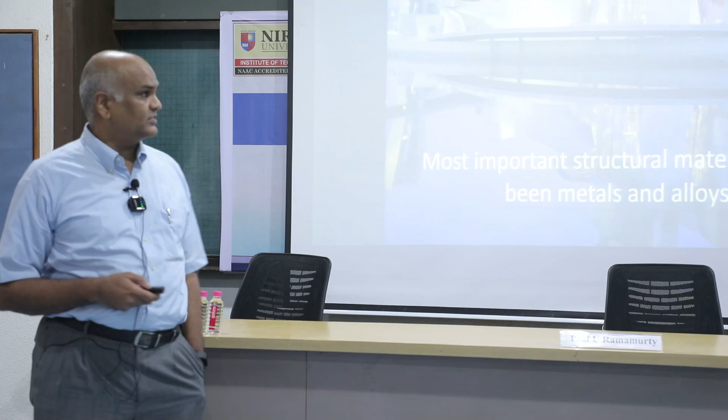Metals are arguably the most important materials in the human history. There is no doubt about it. Why is the case of metals so important? In fact, even our human civilizational development is divided into different ages on the basis of metals, Bronze Age, Iron Age, etc. Right? So, why are metals so important? Because metals are easy to work with. What I mean by work with means you can shape metals into different components, right? Very intricate shapes, like your jewelry that you're wearing, to very large components, for example, a wide-body aircraft, Dreamliner, etc.

And as Indians, those of you would be very proud that actually Indians are the ones who mastered metallurgy quite well in advance. So, ukku that used to be made in northern Hyderabad, those regions, is wootz steel. The steel that used to be exported, and Damascus steel, etc. That used to be very precious, for example. Okay. All right. So metals are very easy to work. You can make all kinds of shapes with them, and they are also tough. That is very important, right?

So let me ask you here, what is the difference between a civil engineer and a mechanical engineer? Both deal with stresses, right? Design of structures, so common things, everything. But civil engineers design structures that are static. Of course, when it comes to earthquake, they may be moving a little bit. But mechanical engineers devise structures that are mobile, cars, aeroplanes, etc.

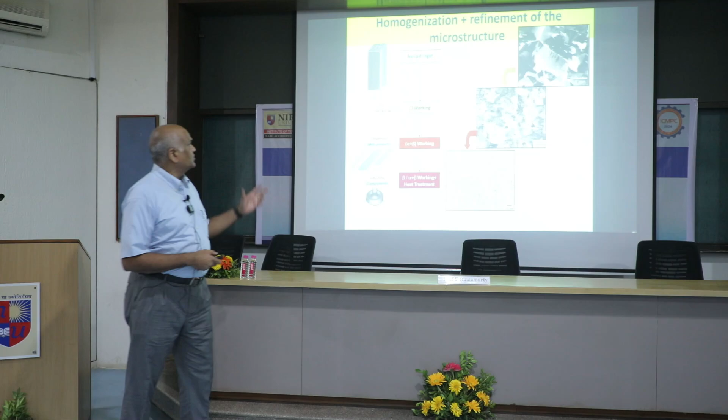So if you look at it, right, what you have is very inhomogeneous or heterogeneous microstructure. The grain structure you can see, right, very fine here. These are all columnar, etc. So when you do metalworking, after you cast the metal, you typically do rolling, forging, thermomechanical processing. You basically homogenize the microstructure. Okay, so this is, for example, a Ti64 alloy, titanium alloy.

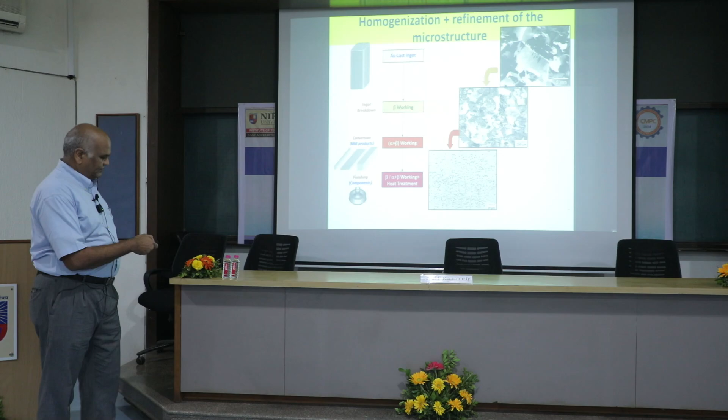So here you have 2 millimeters. So when you take this as-cast ingot and you subject them to these kinds of processes, I won't go into those. These are basically, you heat it and then beat it, right? Metallurgy is heat and beat technology, by the way. You've seen, right? Goldsmiths and blacksmiths, they do this. Blacksmiths in particular heat the iron to high temperature and make all kinds of shapes, heat and beat. So what happens is the microstructure gets homogenized and refined. This is the thing that happens, okay?

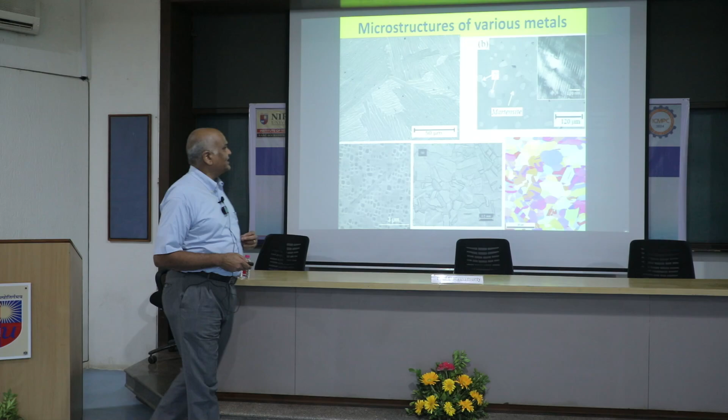So now, why am I talking about microstructures? Because microstructures determine properties, and these are albeit very few examples. The microstructures vary quite a lot amongst them. And microstructures determine the mechanical properties, right? So this is the thing that we all really worry about. When a mechanical engineer tries to devise something new, they all worry about this mechanical performance.

So whether this is the most modern vehicle or a very old vehicle, or an automobile. Elon Musk has this Starship, they call it, which they want to send to Mars. They actually used 304 austenitic stainless steel for it. He says you don't need to paint it, and it's a stainless steel, not composites. And there is a beautiful 10-minute video where he explains why. I hope all of you know who Elon Musk is, right?

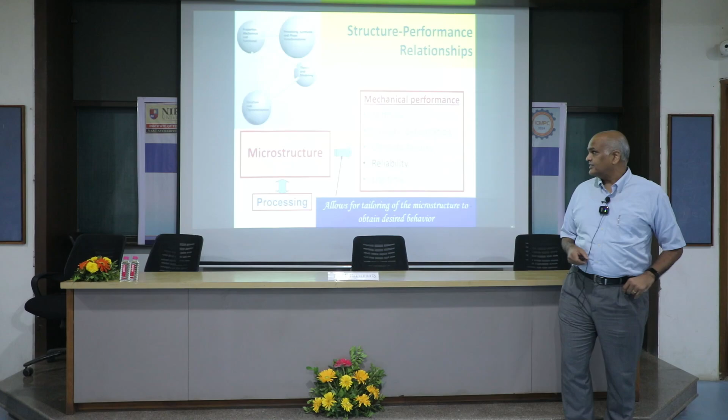So he explains why the steels are nice, because they want a reusable vehicle, and it should not fall apart. Composites, if they catch fire, that's the end of the story. So you'd think the most advanced vehicles would want very advanced composite materials. No, steels are still very nice. So the microstructures determine the mechanical performance, which is what mechanical engineers worry about when they design structures, and the processing determines the microstructure.

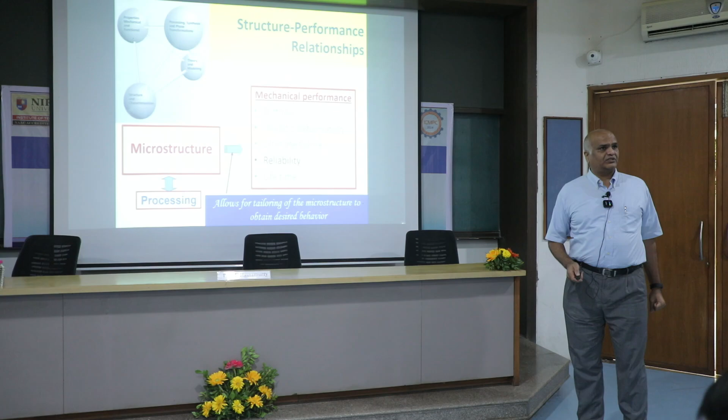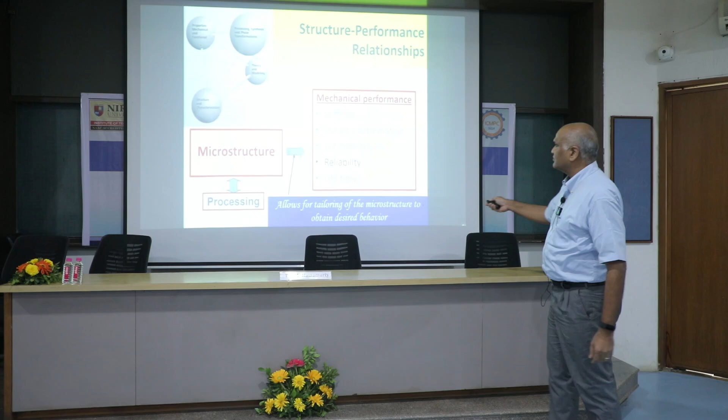So if you understand these connections, how microstructure influences mechanical properties, then somebody from the mechanical engineering department, Professor Patel here, comes and says, look, I want to design this beautiful structure. These are the mechanical performance metrics. It should have this much modulus, yield strength, fracture toughness, yada, yada, yada. Then I go back and say, this is the kind of microstructure you want. If I want to get this kind of microstructure, what processing steps do I have to take? So this is what we spend a lot of time understanding.

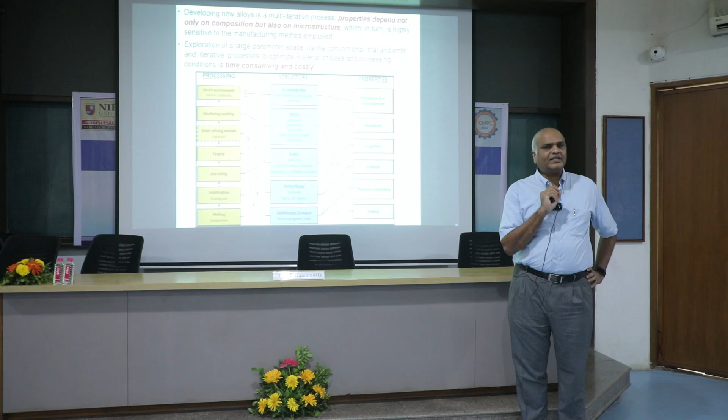And why is it important? Because you change the processing conditions a little bit, the microstructure changes, and as a result, properties change. Early on, our guest of honor mentioned the aluminum additive technologies, right? It all looks simple. Even for advanced steels, the composition is easy to find, but the processing steps are not easy. There are small changes that they don't tell you. Recipes are very important, right?

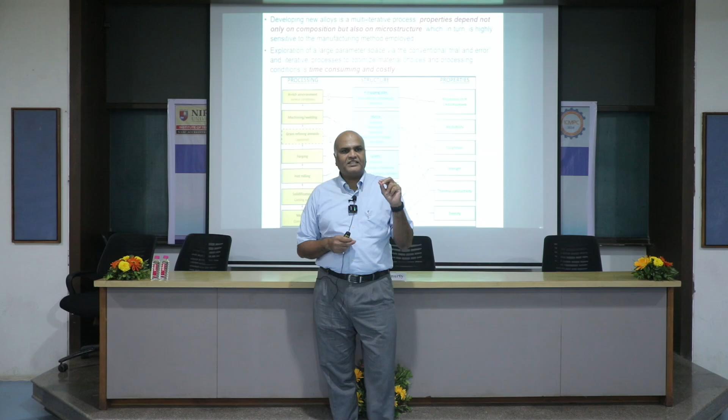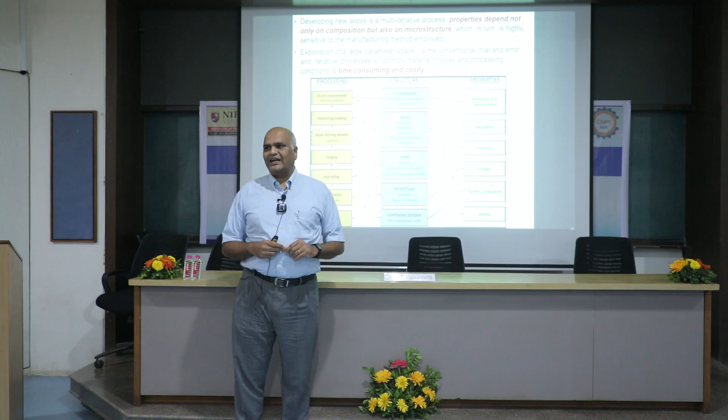Professor Patel knows that I'm a foodie. So if you're making a nice Gujarati curry dish, there are ingredients that you have to add at specific times. If you just take all the ingredients and put them in one, you'll make a khichdi, but not necessarily a good one. So even here, in metal making, there is a recipe. You need to add at certain times, at the right temperature, with the right processes. If you miss those, you end up with bad microstructures and bad properties as a result. That's why developing new metals and alloys for technological applications is a very time-consuming, costly process.

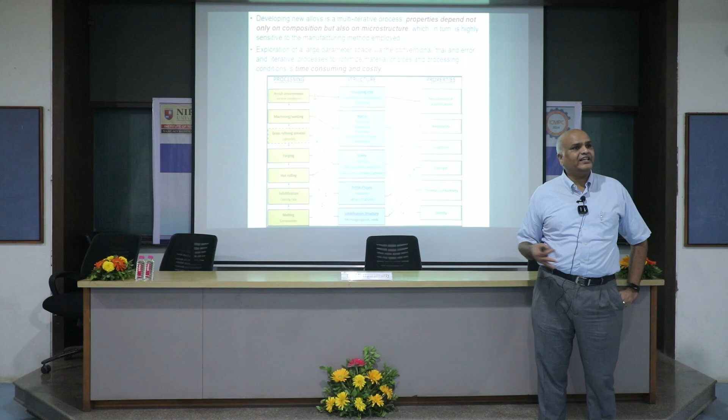Okay, so now what are the tools that I have in my hand to control the microstructure? Naturally that is the thing. One is composition. I add carbon, I add nickel to stabilize the austenitic phase in steels, chromium to increase corrosion resistance, so on and so forth. So composition, the chemistry of the alloy, is one. But that's not the end of it.

There are the processing conditions, how fast you cool. Sometimes we say furnace cool, sometimes something else. And the thermomechanical parameters. This is a broad description of the tools you have, but these are all available to you to tune the microstructure of the material, which will in turn tune the mechanical properties. Now this is all background. Keep that in mind because I'm going to switch over to additive manufacturing. Additive manufacturing is the opposite of the subtractive manufacturing that we always use for making components.

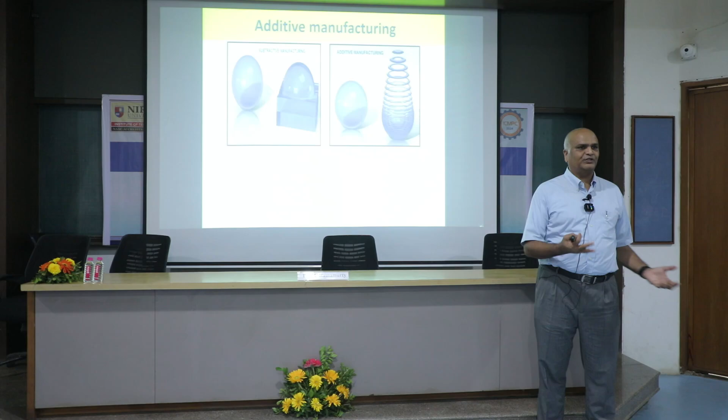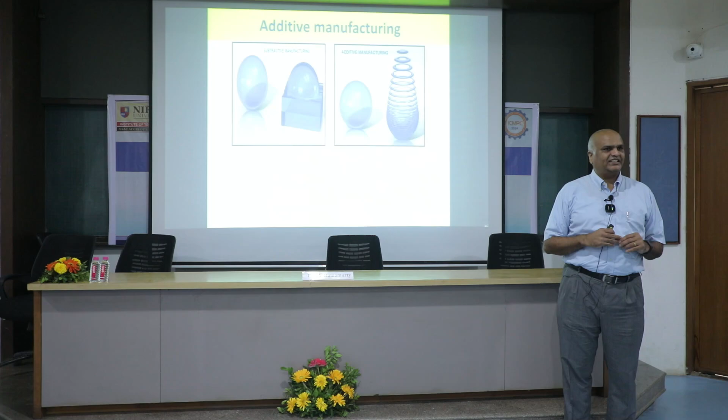So you make a big casting, you basically roll it, forge it, etc., and then machine it, subtract the material to make the final part, right? So this cartoon will tell you, whereas additive manufacturing, you just take things and put layer by layer to build the 3D structures. So additive manufacturing is a lot closer to nature's way of building materials, components, right?

So there are two things that you can already guess the advantages. One is in additive manufacturing, the material loss during manufacturing process is very minimal, right? Here in subtractive, you lose all this additional material. And the other thing is, if you want to make a hollow sphere, conventional manufacturing will not allow you to make it in any way, except for you take two hemispheres that are hollow and weld them together, right? Whereas you can do that in additive manufacturing, right?

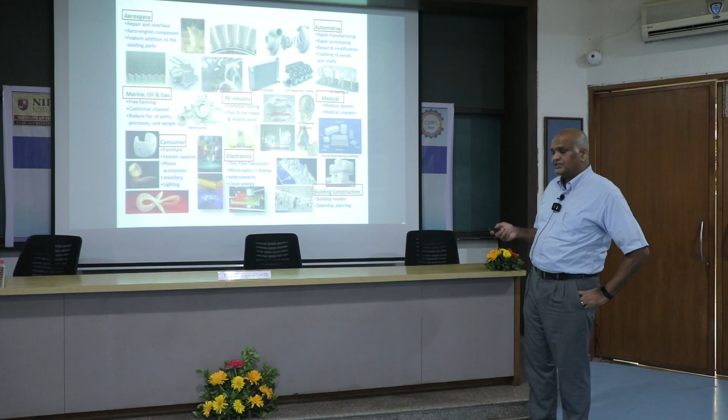And so you can build far more complex geometries in additive manufacturing compared to conventional manufacturing. So the design freedom that you have is substantially higher, right? And as I said, nature actually builds in 3D way. This is an example here. Okay, and so as a result of the lot of advantages, especially the design freedom that you have, topology optimization for stiffness, strength, toughness, etc. By minimizing the material that is used, you can actually get quite a lot of advantages, and there are a lot of industries that are interested in it. I am only interested in metal 3D printing.

Okay. Now, so what we do is basically build bottom up, right? You are essentially at any given instance dealing with one voxel of a material, if it is a powder based 3D printing, etc., and you build bottom up, right? That is one important difference between subtractive and additive manufacturing. Okay, and you have to have raw material either in the form of powder or wire. We only deal with powders in my talk. We haven't yet started working on wire arc additive manufacturing. And because metals have high melting points compared to polymers, you also need a heat source to fuse the powders or wires. Okay, so these are the three ingredients.

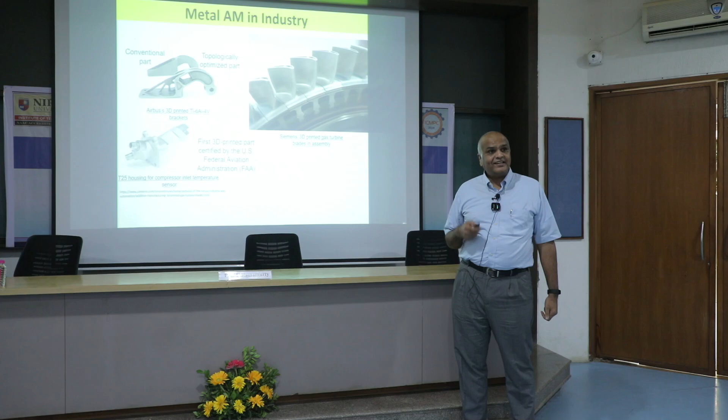And there is a lot of industry advantage. Okay, so people are already building, so you can actually topologically optimize a part like this compared to conventional parts, so you can actually reduce the weight, have a higher stiffness, and like khichdi, this is one pot synthesis, right? One step process, right? It's not necessarily many steps involved. That is one major advantage of 3D printing.

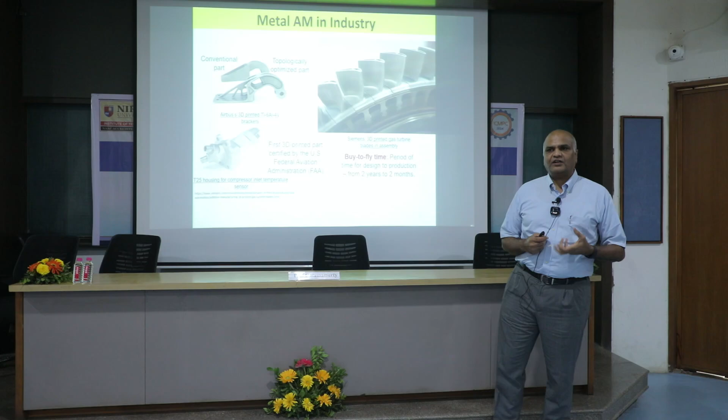Okay, and actually 3D printing of metals in particular came from the rapid prototyping technology. So if one of you has a new design idea, right? It's standard, you design, you make a prototype, test it, improvise, etc. before serial production of that part, right? So prototyping time gets reduced substantially because of the 3D printing. And as a result, you can actually have very quick insertion of new design concepts into service.

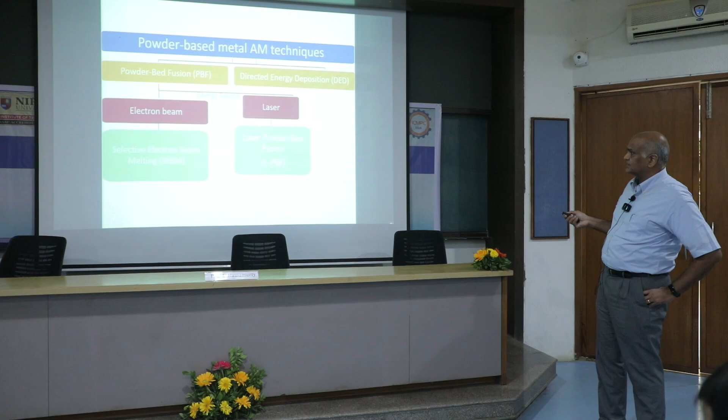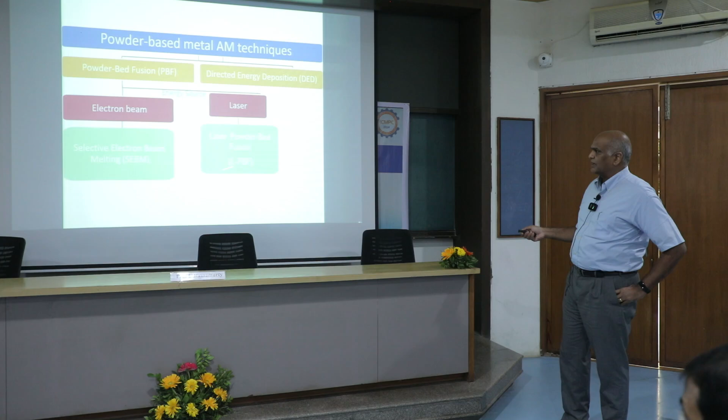Okay, so in the powder metal based AM techniques, there is powder bed fusion and directed energy deposition. These are two techniques, depending on the energy source. Laser is typically used in DED, so some people call it LDED. Okay. In the case of powder bed fusion, you can either use electron beam or laser beam. So LPBF, laser powder bed fusion, is a very common thing that one worries about. So what is the process? You basically make a bed of powder, okay, a thin layer of powder, predetermined thickness, and then you take laser or E-beam and fuse it wherever you want, okay. This I think all of you know very well.

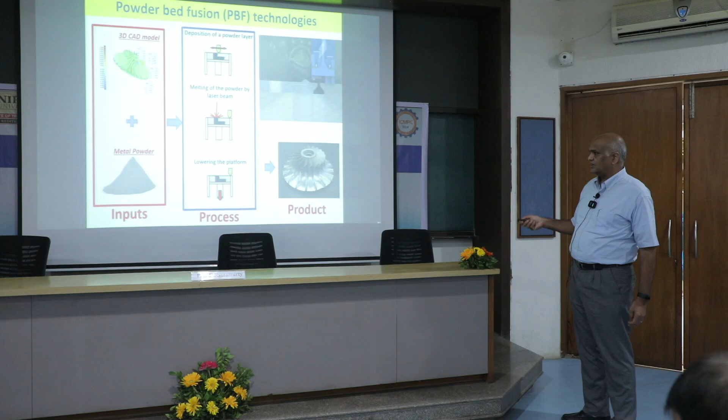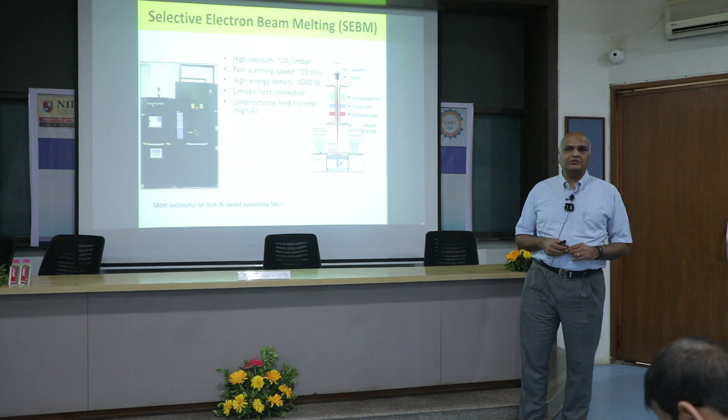So what do you need? The inputs are a 3D CAD model, sliced, etc., and then metal powder, and then you have a laser where you can print it. And so I don't think these things are working. In the electron beam technology, what you use instead of laser is E-beam. It's much faster. You have to do it in a vacuum, so you can actually do it where cleanliness is very important. Oxidation of the alloys is problematic. So super alloys, for example, are most preferably manufactured using EPBF technique.

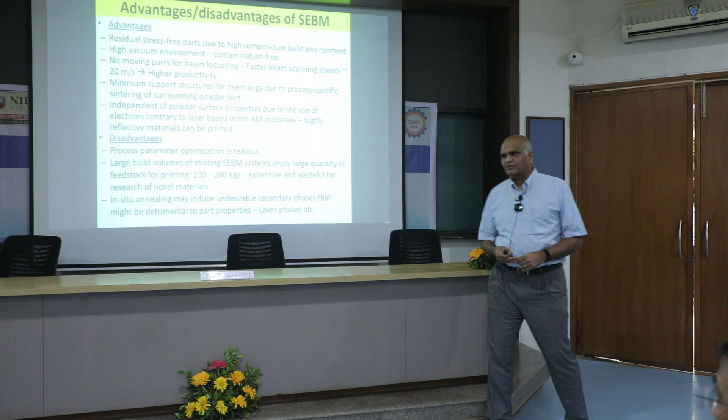Okay, so each of these techniques have advantages and disadvantages. I am going to skip over this. I think you have video available. You can look at it later. For example, you can get residual stress free parts because in EPBF typically we heat the base plate. Okay, that is the thing. So you can actually make large parts, but this is much more expensive compared to LPBF technique.

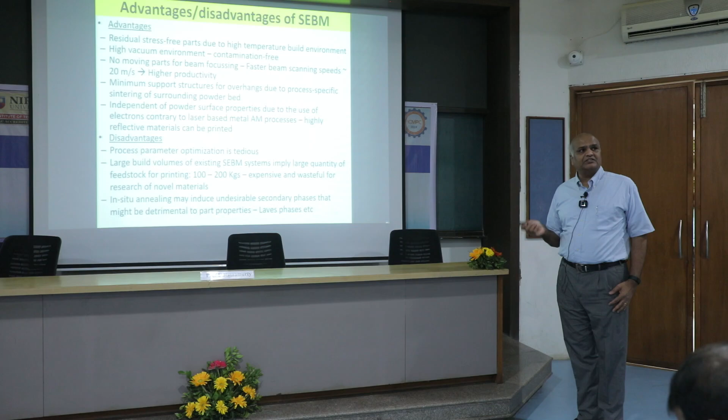Okay, in the laser powder bed fusion, as I said, so for example, this thing is working. So actually a laser scans, and then you deposit a layer, again scans, and you build bottom up one layer after the other, a 3D part. Okay.

There are again advantages of all the techniques. LPBF, laser powder bed fusion, gives you the highest resolution in terms of specimen features. So you can actually build thin-walled structures.

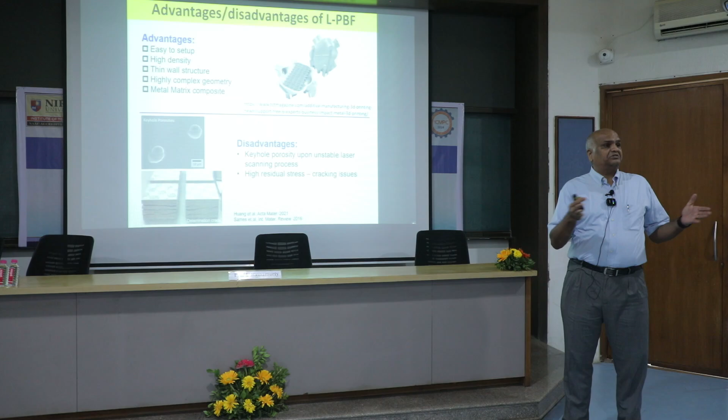So I was talking to a Boeing executive some time back. If you already have an engineering component that is being used, and you say, okay, I have this new production method to make it, it may save me a little bit of weight, and replace it, they are not going to do it, because this is still a costly process. So you need to bring additional advantages, right?

So you can say, look, I will build a heat exchanger with this, which will be more efficient. For a heat exchanger, if I want to reduce weight, I have to have thinner walls. So these are the additional functionalities that you can bring in, because you can have very precise, very thin layers of material. So you can have cooling channels very precisely designed and built, things like that.

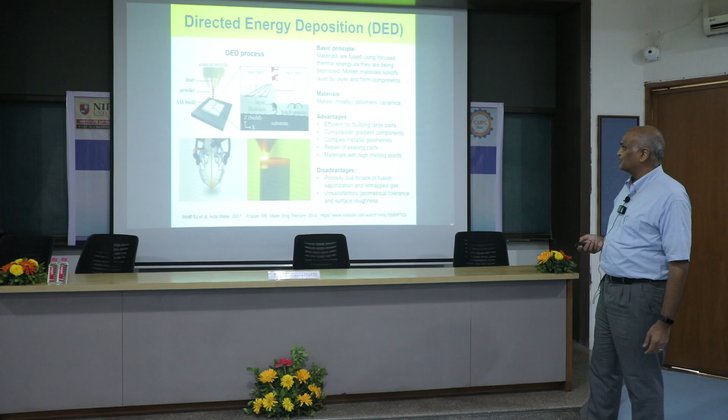So this is one of the advantages of thin wall structures. Of course, it's very costly, you need a laser beam. That's the disadvantage. Directed energy deposition is a lot more common, simpler. You basically have a CNC machine, and instead of the machine tool, you put a laser beam. Coaxially, as you can see here, the laser comes and the powder also comes, and in flight the powder melts and gets deposited.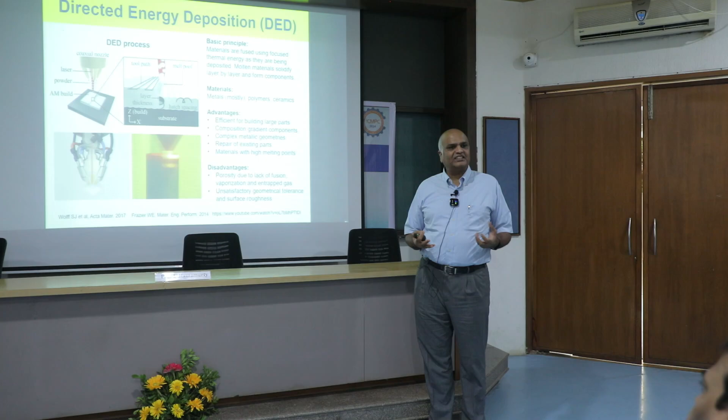So you have 5 degrees of freedom that is possible with CNC machines. As a result, you can have much more complicated structures built with this. You can rotate it in the 5 degrees of freedom. This one allows you to build very large parts. There is actually a California company which builds a whole rocket casing in one shot with this technique. But it's much coarser, etc. So there are a lot of differences with this technique.

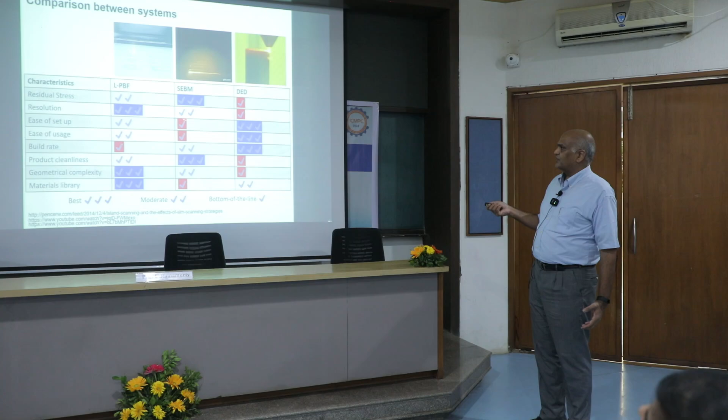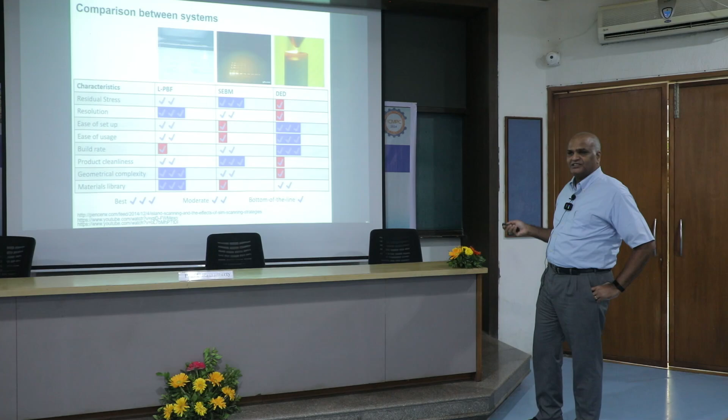So this tells you the 3 different techniques and their advantages. For example, from a residual stress point of view, because you're depositing layer after layer, there is a heat buildup, so significant residual stresses build up. From that perspective, electron beam melting is much better. If you are looking at low cost, easy to set up, easy to use, high build rates, DED is a much better technique. And if you want very complex shapes, LPBF is better. So these are the advantages and disadvantages of these methods.

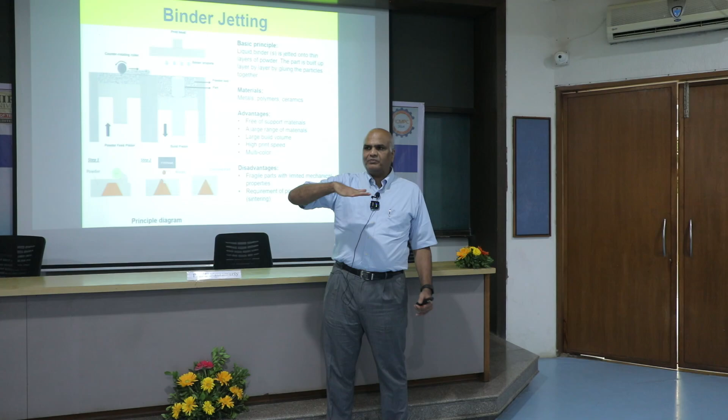Now there is another technique completely different from this. It's called binder jetting. You don't need lasers or e-beams. There are companies, Desktop Metal, Hewlett Packard, HP, which is a leader in 2D printing, that have these technologies. You make a powder bed, just as in the LPBF technique. Instead of a laser, you deposit essentially a binder, a glue. The older ones would know inkjet printers, color printing inkjet. So the same sort of way, you print binder.

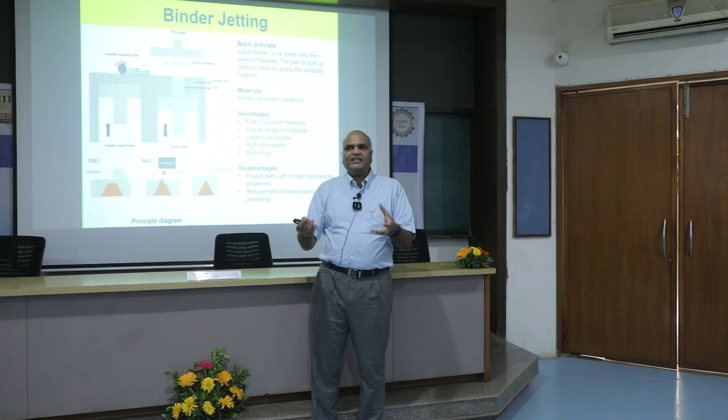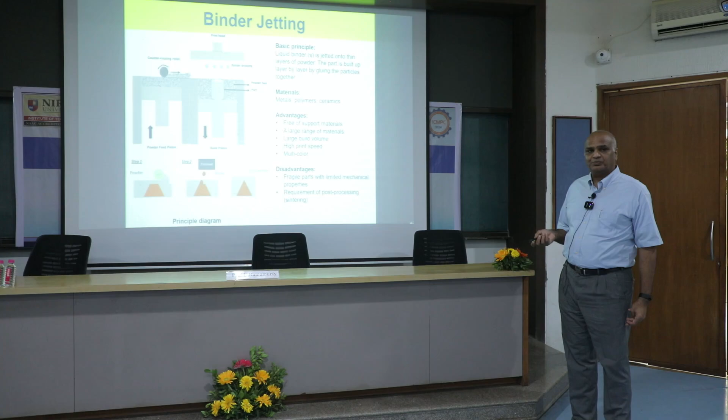So eventually you get a green part. You then burn the binder out and then sinter it. This is a much cheaper proposition comparatively. And as of today, in terms of volume, this is much higher compared to all the other techniques put together. We worked with HP on this, so I will show you some results later.

Now, there are a lot of advantages of additive manufacturing. Basically, it allows you flexible manufacturing. You can print a steel part today and an aluminum part tomorrow. You can minimize inventory cost because you don't need to keep stock of all the parts. This is particularly important for aerospace companies. You can get near net shape final parts in one step, so there is very little material loss. This is what they call an excellent buy-to-fly ratio.

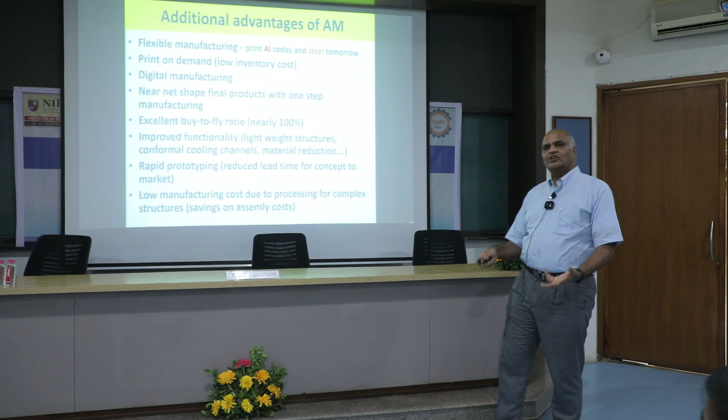For example, titanium is extensively used in the aerospace industry. If Boeing or Rolls-Royce buys 100 kilos of titanium, the final part will not be more than 15 kilos. There is a lot of loss of material in machining, forging, etc. Here, if you buy 100 kilos of powder, most likely the flying parts will also be 100 kilos. So this is where some of the cost will be offset. I already mentioned rapid prototyping and functionality. Manufacturing cost is still very high, but some of these things offset it.

Now, as a result, this is digital manufacturing. This is also seen as a key part of the fourth industrial revolution. Now, there are questions to ask, right? Whenever you come with a new way of manufacturing anything, they will ask these key questions. So the first one is benchmarking.

So if I'm saying that you are already using this part and I want to replace it with a 3D printed part, you have to say this part is good compared to this, right? How good is the 3D printed part? The proof is in the pudding. The second one is there are so many different 3D printing technologies, even for metals. So which one is the better one? Is the lowest cost one always the better one?

So the final thing is porosity. This is not applied to wire arc additive manufacturing, but to powder-based ones. In powder metallurgy, we know that anytime you use powders, you will always have porosity, right? Pores. These pores are deadly from a fatigue perspective.

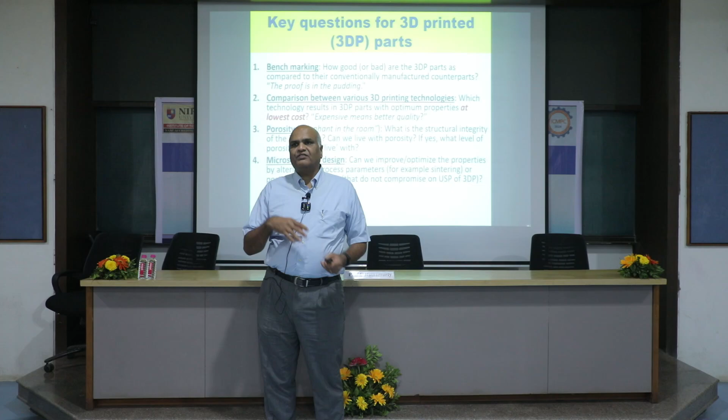So if it is a one-off, a rocket that's only used once, it's okay, no problem. But if you are going to use it again and again in a washing machine part, a car part, etc., then the pores will act as crack initiators under fatigue loading, and the life of the component will be very low. So structural integrity aspects are a big problem. In fact, this is still not overcome.

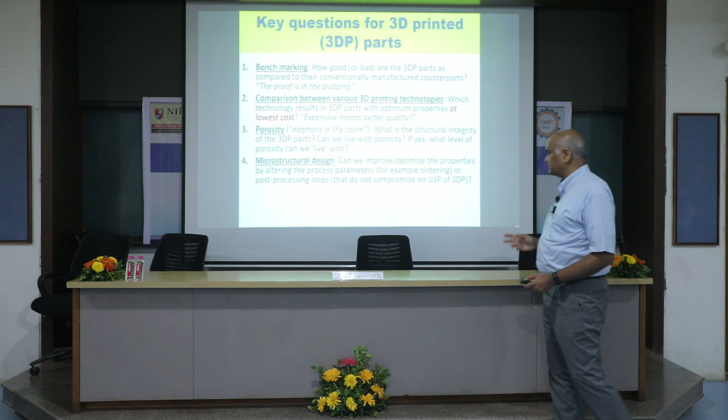So as of today, although there is a lot of investment all over the world in 3D printed parts, certification is a big problem. Qualification is okay. All the parts being used are static parts, not rotating parts, because of fatigue issues. And of course, there is the microstructural design part. I will talk about it later.

Now, I already mentioned this. In conventional manufacturing of metals, microstructures are very critical. For tuning and designing the microstructures, I told you about the three tools I have: composition, processing conditions, and thermomechanical processing. Now, I can still vary the composition for 3D printed parts, but the other two are not there. So this is a major challenge.

The thing is, I don't have the kind of design freedom, the degrees of freedom available for designing microstructures, not components. I don't have it. So this is a challenge, but we have other avenues to tailor the microstructures in these materials, and hopefully I'll show you that.

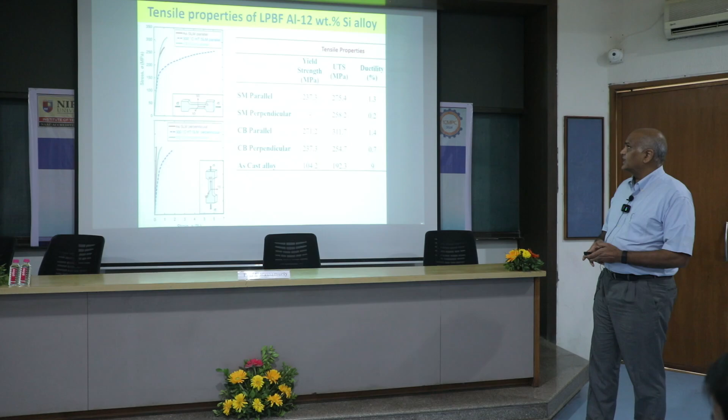So when you 3D print the parts, the mechanical properties are very different. Again, the chief guest mentioned mechanical performance. These are the things that will determine whether a component gets used or not. So all these properties are what we need to look at, and I will go through them very quickly for you. The first work when we got in is this.

Actually, this is a die-cast alloy. This is aluminum 12 silicon. When you add about this much silicon, you get to the eutectic point in the phase diagram, so it's the lowest melting point material. Lower melting point means higher fluidity, easy to cast. So if you take your car engine or bike engine, most likely it is made of this alloy, with slight variations, magnesium and all that.

When we looked at the mechanical properties, we did tensile testing, parallel and perpendicular, etc. What we noticed: the same alloy in the cast form has a yield strength of 100 MPa, UTS of 200 MPa, and about 10% ductility. This is why it's used. So we take the same alloy, make a powder of it, and use laser powder bed fusion to 3D print the alloy.

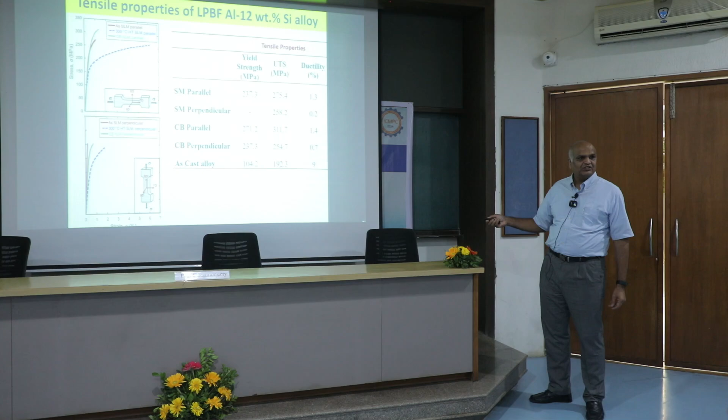You see that the yield strength has gone up a lot, more than a 100% increase. UTS also has gone up a bit, but ductility has come down. So this material now looks very brittle.

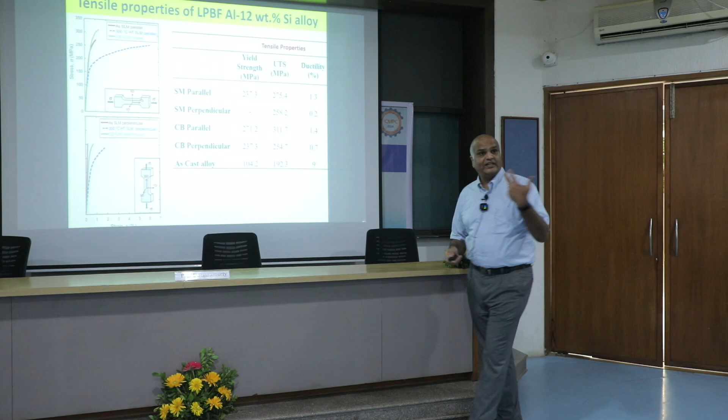So if you take it to a mechanical engineer and say, okay, use this material, they will laugh at you and say, go off, because it's brittle. If you hit it hard, it may fracture, right? So you gain on strength, very substantial reduction in ductility.

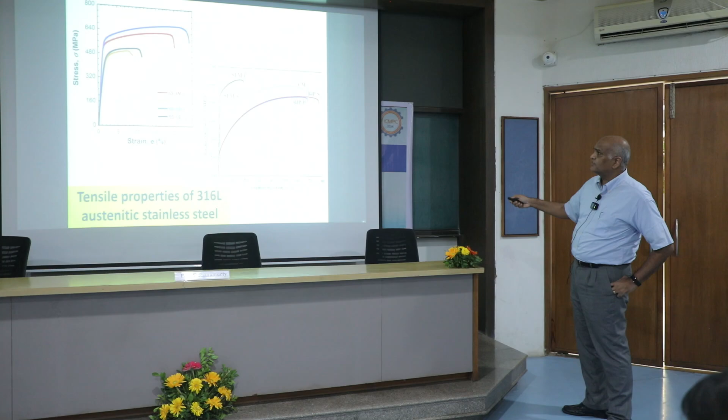No, this is austenitic stainless steel 316L, very widely used. So for example, look at this here. The green is conventionally manufactured. You see somewhere around 250 is the yield strength. It work hardens a lot and fails at 600. If this is selectively laser melted or LPBF, you see the yield strength is much higher, and there is some anisotropy.

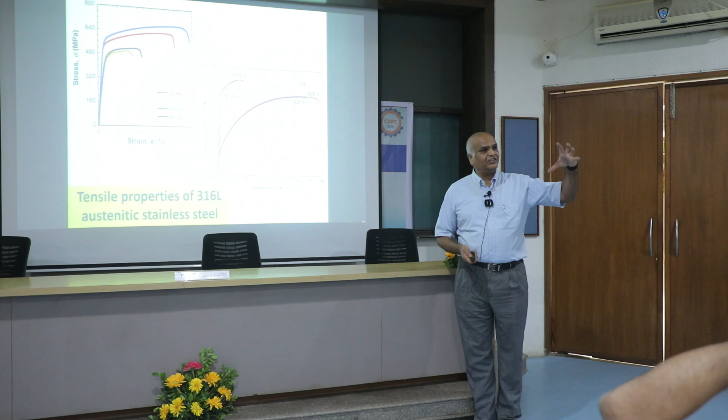Okay, so the bottom line is strength goes up, ductility comes down when you 3D print the alloy compared to conventionally manufactured alloy. So this is the general observation. Upon laser powder bed fusion, this 3D printing technique, but it's also true for other techniques, strength goes up, ductility decreases. Okay, what is the reason? What is the microstructural reason?

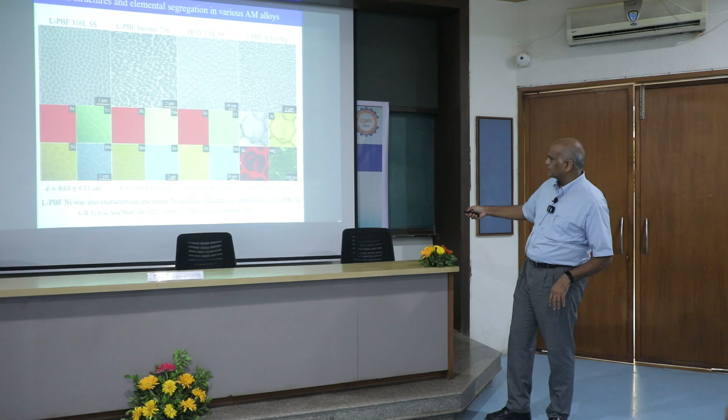Why does this happen? These are schematics, and there are subtle variations in these cell structures. In this case, you have only elemental segregation, whereas in the aluminum silicon case, there are actually nanoprecipitates that form along the cell boundaries. Here you can see the precipitates. So why does this happen?

You change the process, it's the same alloy. Conventionally manufactured, you get one kind of microstructure, one dislocation density. So what are you doing here? You are bringing a laser, and at any instance you are melting one voxel, not a pixel, a volumetric cell. You melt it, it solidifies, then you melt the next, line by line.

When you scan the next line, the already solidified line gets heated up and cools down. Then you deposit another layer, and this already solidified layer gets heated up and cooled down. But it can't expand and contract freely; it's constrained by the substrate, stuck to it. So it undergoes some serious thermomechanical cycling.

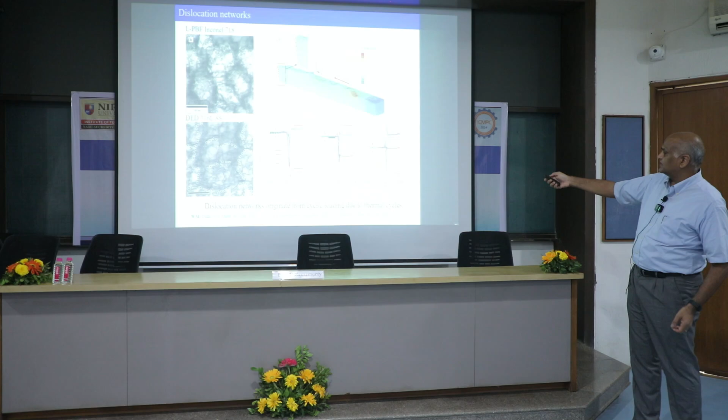So if you do take the metal, subject it to plastic straining, fatigue, what we call, you get dislocation accumulation, okay? And that is what happens. Those dislocations accumulate around the cell walls, okay? So essentially, this simulation tells you that. There are large amounts of cyclic stress fluctuations, plasticity, and as a result, lots of dislocation activity. So you get a large amount of dislocations into the material.

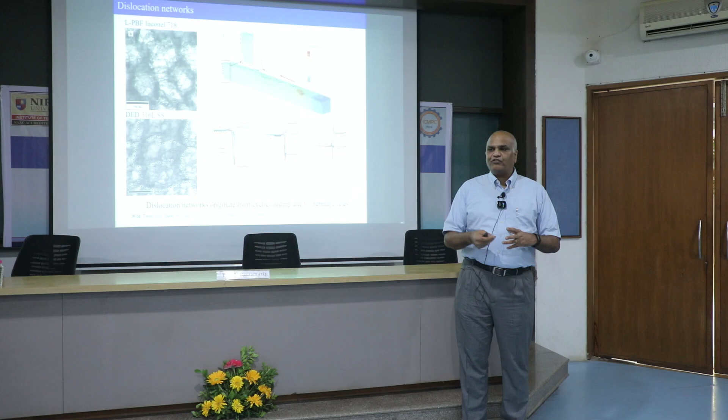Higher the dislocation density, higher will be the strength of the material. Those of you who studied strengthening mechanisms, work hardening: if you take a piece of metal and you deform it, the strength goes up. And that is what happens here. I'm not working on it purposefully, but the way I'm manufacturing this, there are these changes that happen, and as a result, the material's properties change quite dramatically.

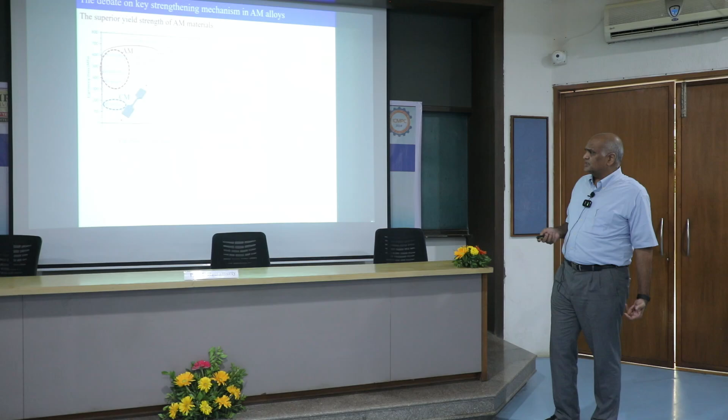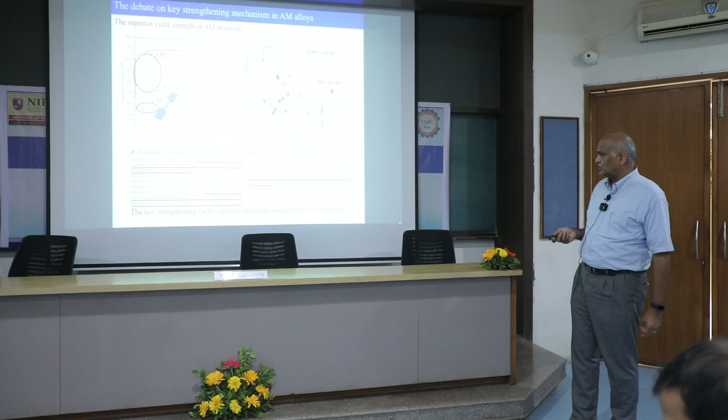Now, there are lots of debates about this. Some people say this is due to a Hall-Petch kind of thing, where you have essentially grain boundary strengthening. So the microstructure length scale changes, now the cell size, that is the reason. And some other people argue that it is because the dislocation cells have higher dislocation density, and that's what causes the strength.

To resolve this, now I'm getting into my own research quite deep. What we do is we make these micropillars, not conventional standard tensile tests. This is a 2 micron scale bar, so you can see this is maybe 3 microns in diameter. We go with a focused ion beam, machine it, and make sure they are all oriented in the same way. And then we can test this as a function of the pillar diameter and look at these properties.

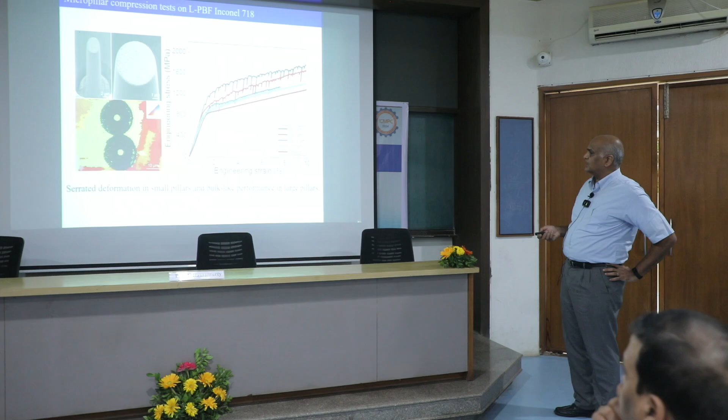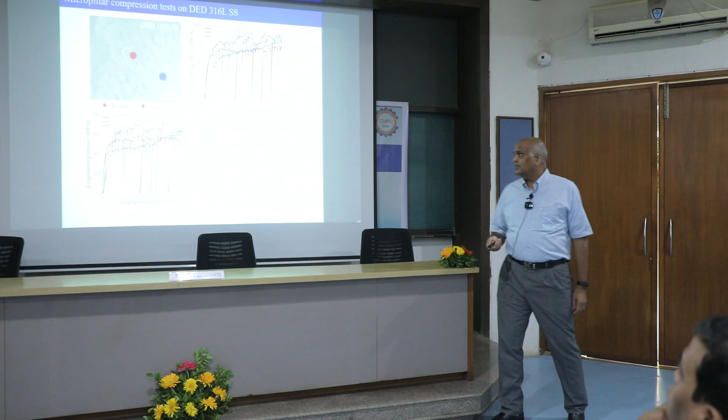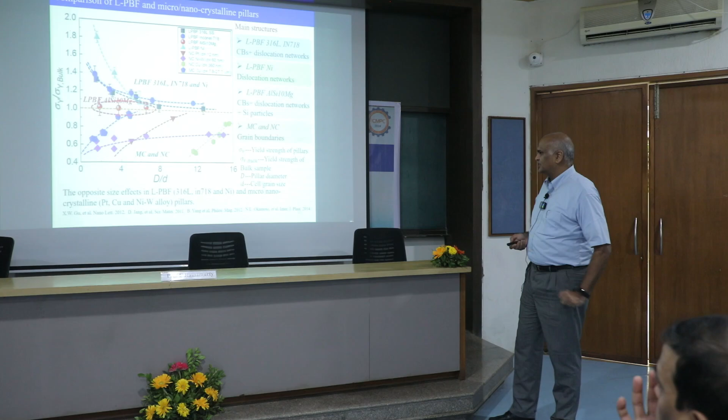So I won't go into that, it would be the Ramayana, Mahabharata. Now when we look at aluminum silicon, there are nanoscale precipitates. You can see the cells nicely here, and then we get a bulk-like response, because here there are precipitates of silicon along the cell boundaries. We go into the gory detail of why it is happening, and compare it with, let's say, nickel that is deformed, etc. I won't go into those details.

The reason why the strength increases when you get to smaller sizes: when you deform the material, there's something called a Frank-Read source that operates. This punches out dislocations continuously, right? So dislocations multiply like Indians multiplied after independence.

Sorry, I'm an Indian too, don't take offense. As proud, if not more proud than you.

What happens is, if you take a well-annealed gold piece and hit it with a hammer, the dislocation density goes up inside the material. That's what causes work hardening and strengthening. So the mechanism is these kinds of sources keep punching out dislocations. Now when you have very small diameter specimens, essentially micropillars, near the free surfaces you have what is called a single arm source, and they operate and cause this strengthening.

But when you go to much larger diameter pillars, the full Frank-Read sources inside are operational, and they continue. So you get a bulk-like response here, whereas much higher strengthening when you have a much smaller diameter pillar. These are the kinds of mechanisms we can explain. And then we show through TEM what happens, the dislocations cutting through the cell walls and all that. So we examine this on different things.

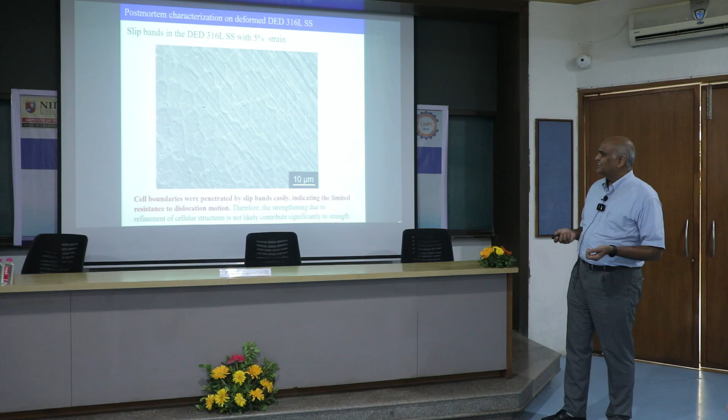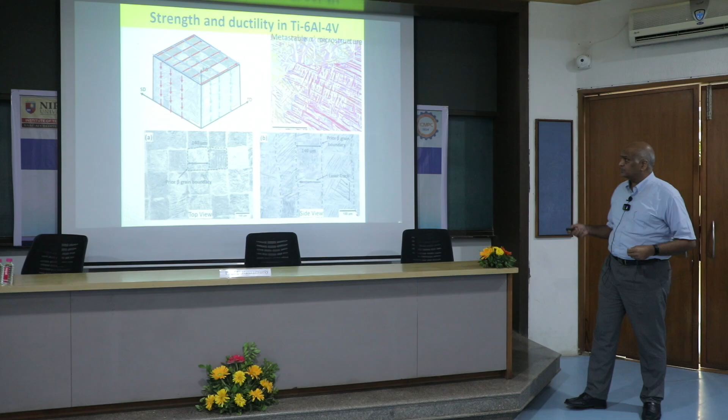Now, let me just focus on Ti-64. This is a very important aerospace grade alloy, right? So what happens is, for example, when you fabricate this alloy with a particular condition, you get on the top square grains, and on the side these are actually columnar grains. So there is epitaxial growth that occurs, and as a result you get columnar grains. But remember, the conditions that prevail are rapid solidification conditions, so you get martensitic structures. So these give very high strength to the material.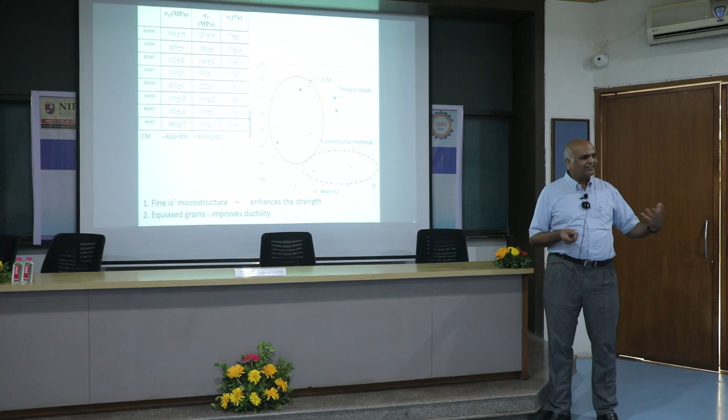So for example, if you look at conventional methods, compared to that, we get high strength. Okay. So again, the same story. When you take a 3D printed part, whether it's Ti-6-4, aluminum alloy, steels, everything, the strength will be higher. Typically, ductility will be lower. And then we can also heat treat it, change the mechanical properties, etc. So this is the summary: the yield and tensile strengths go up, ductility comes down. The strength enhancement is because of the dislocation density being higher, and that's also the reason why you have lower ductility.

Now, it's not enough that you have high strength, right? You can have a very strong batting lineup, right? But if you have Ajit Agarkar this whole time, that's the weakest link.

And then, look at Afghanistan today. I don't know whether you followed. They played brilliantly. Today they collapsed, right? 56 all out, and they lost. How many of you followed this match? So, okay, yeah, I do all these things. So what do you say about Afghanistan cricket? It's brittle, right? Indian cricket used to be like this. You wake up on a fine day, a little late, 1 hour later, it's 60 for 6, and you are disappointed the whole day. Very, very pathetic thing. Indian cricket is only for strong-hearted people. It's changed a lot. But now. So brittle, we had a very strong batting lineup. We used to have openers Sehwag and Gambhir and VVS and Rahul and Sachin, God himself, I shouldn't forget, right? Ganguly. But then what happens?

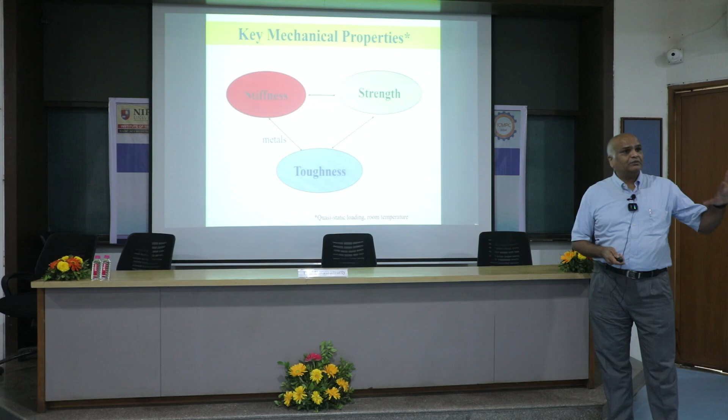So the thing is, we play with strength and toughness combinations there. So you need to worry about fracture toughness, especially as a mechanical engineer, right? So there is a conflict, though.

This is in old time. There was this nice, beautiful rendition about Saraswati Ma this morning. Okay, so Lakshmi and Saraswati, in old times, they don't live in the same house, they say, because one is Bahu, Brahma is supposed to be the son of Vishnu, and as a result, Lakshmi's Bahu is Saraswati kind of thing. Well, it's okay. It's just Indian mythological stuff.

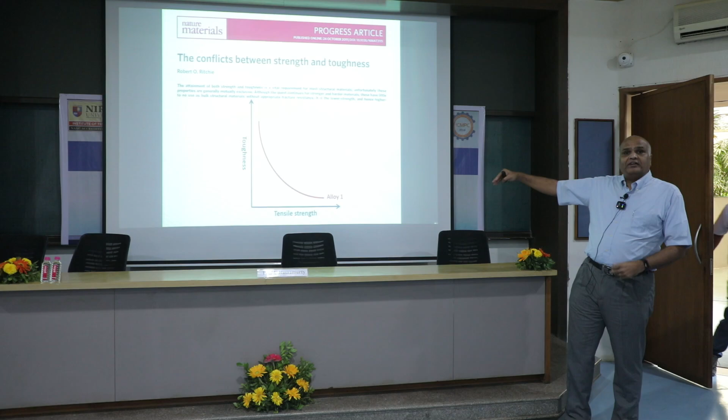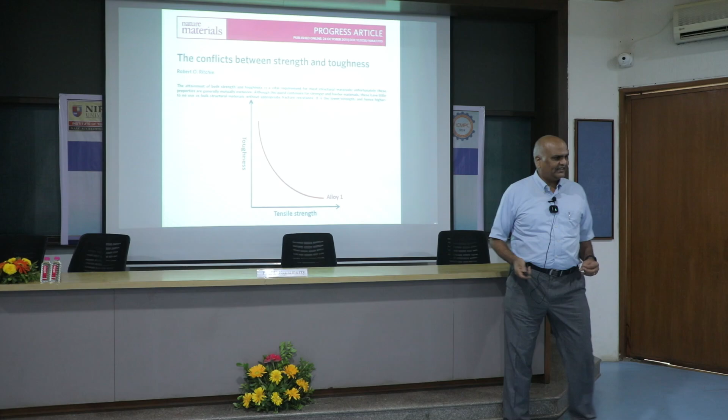So toughness and strength go in opposite directions, right? When you try to enhance the strength, toughness comes down. So this is what we think. And if you go back and remember our 3D printing, what I told you is when you 3D print an alloy, strength goes up. So what do you anticipate? That toughness comes down, right? Rob Ritchie actually wrote that, and both are important properties, so you have to optimize.

And by the way, this is my academic grandfather, Rob. And I will be texting him later about the England India match this evening. He has been texting me already.

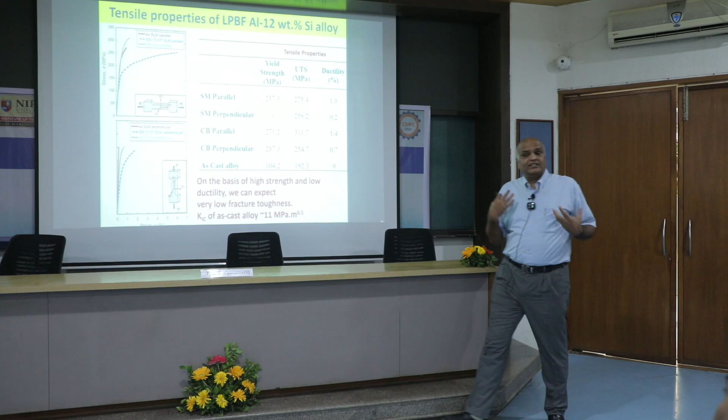So the strength goes up. Remember this slide? When you take the cast alloy 104, the strength has gone up, ductility has come down. So that's already an indicator that fracture toughness may be a problem, right? And the cast alloy's fracture toughness is 11 MPa root meters. So we were thinking this material's fracture toughness will be 1 or 2 MPa root meters, brittle as glass.

Glass we use for windows and all that, which is not a structural material. You don't make a mechanical device with glass, right? So that is what we were anticipating. Okay, this is where experimental things are fun.

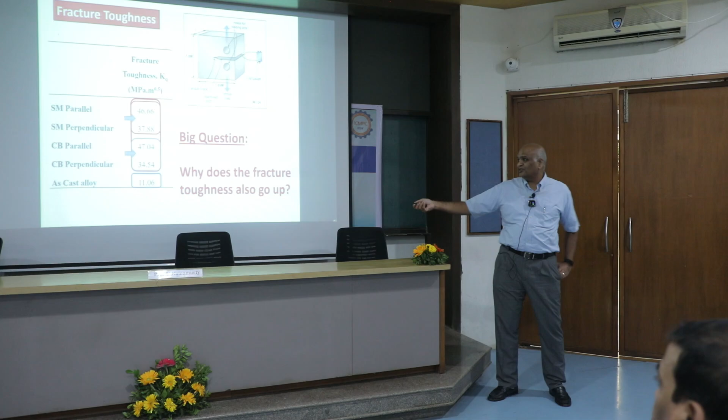So when we did proper fracture toughness measurements, the cast alloy's fracture toughness is 11 MPa root meters, and we were expecting it to go to 1 or 2 MPa root meters, but to our surprise, the fracture toughness has gone up. Not by 100%, but by 400%. Look at these numbers. It's much more anisotropic, but fracture toughness has dramatically gone up, which was a very surprising result to us.

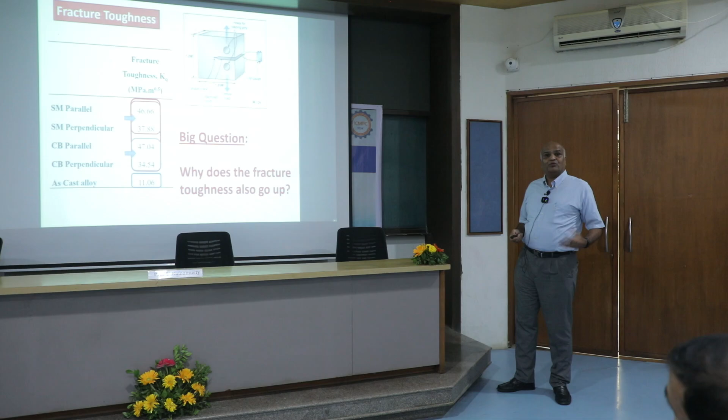So why does this go up? Go back. In conventional manufacturing, it's a top-down approach. You make a bulk, machine things up. Here, like nature, we build bottom-up, line by line, layer by layer. And the way you build the material gets embedded in it. Yesterday I had a nice jalebi. The way you make that design will be there inside, how handy or crafted the person spreading it is.

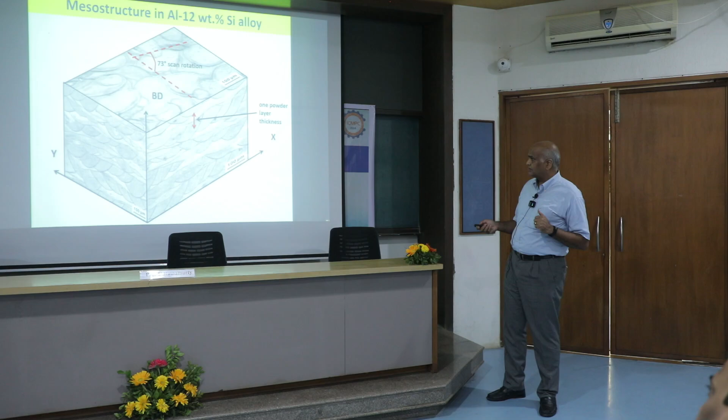So what happens is, in these hatch boundaries, there is silicon that decorates them. Silicon is a brittle material. When a crack comes to this point, it dives down because there is a lower resistance path. Like our students, path of least resistance is what cracks also like. So when they dive down, not knowing how difficult it is to come back up, that is when you have to spend energy.

Just let me give you an analogy, right? Let's say you run. I think Professor Naveen ran this morning on campus on relatively flat land. You ran 10 kilometers, you spend say 1,000 calories. The same landscape, but now like this, same 10 kilometers, you started and ended at the same point. If it is very undulated, you would have to spend substantially more energy, right? Maybe 10,000 calories.

So the cracks also, when you have a much more tortuous path, you have to spend a lot more energy. Nature knows this, and that's why a lot of structures like our bones have a lot of crack deflectors built in, right? So when we 3D print the structure, there is this mesoscopic structure which deflects the crack, and you can see it in the fractographs. There is quite a lot of crack deflection. When it deflects, you have to spend more energy to keep the crack propagating in the mode 1 direction, and that's why fracture toughness goes up.

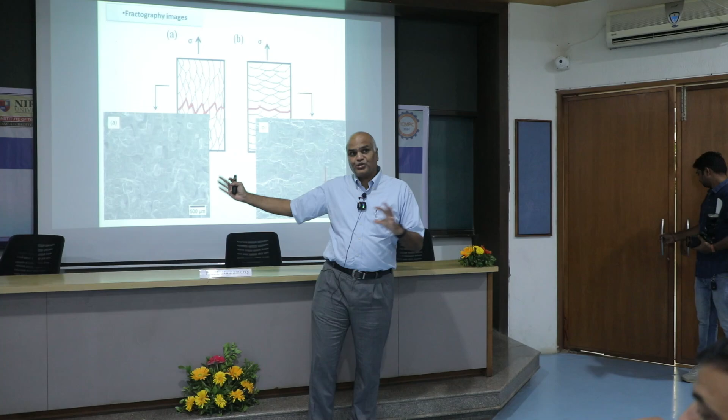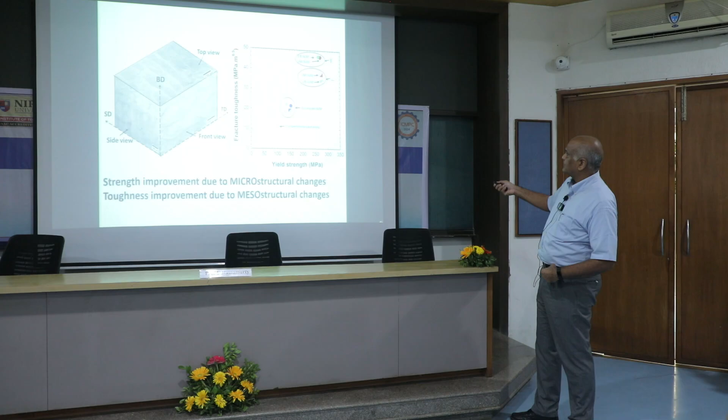You remember I talked about the design degrees of freedom that I have with microstructures. When God closes a door, he opens another window, they say, right? Thermomechanical processing is not an option, etc. But mesostructure design I can change, I can play around with this. I can actually enhance the toughness of the material. So with aluminum silicon, you get high fracture toughness and high strength, beating the conventional wisdom. And we showed this in many other cases.

What time is it? Okay. There is also the fatigue aspect, but I will skip this. Let me go to the end of the slides. So porosity is a very big factor, and you have to deal with it, and we also investigate it. Go to the last slide. Yeah, this one, conclusions. All right.

Hopefully I convinced you the microstructures of 3D printed alloys are very distinct from conventionally manufactured alloys. Same alloy, conventionally manufactured, you get one microstructure; 3D printed, a different microstructure. As a result, they change the mechanical behavior, and you need to understand those before you can comfortably use them in applications where structural integrity is critical. But it also gives you new exciting ways to tailor microstructures and manufacture components. People now talk about bespoke microstructures for given applications.

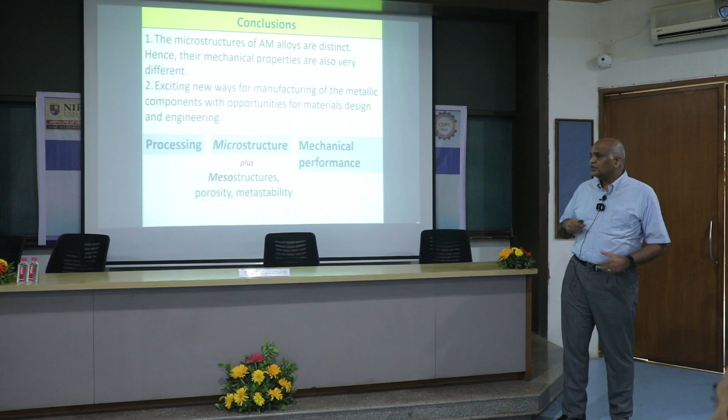I also mentioned the processing, microstructure, mechanical performance connections that we worry about. With 3D printing, you also have these mesostructures that come about because of the way you build, metastable structures, which I didn't talk about, and porosity that affects fatigue performance, etc. So there are a lot of additional complexities, which is good because that keeps us in business, so that we can do new research.